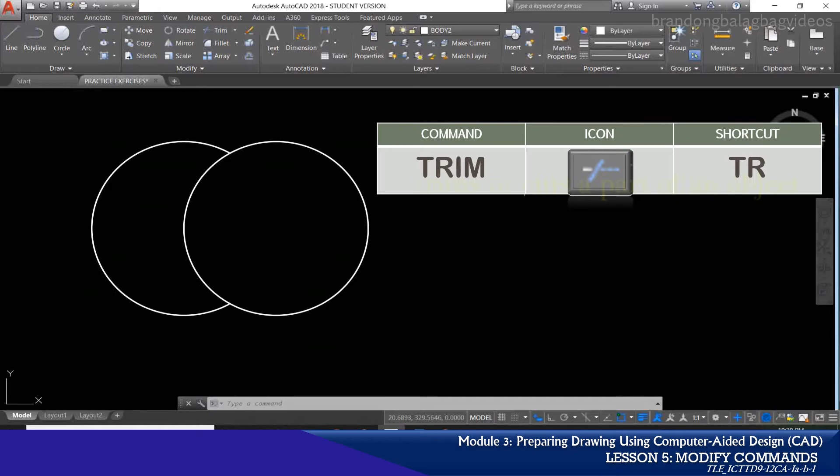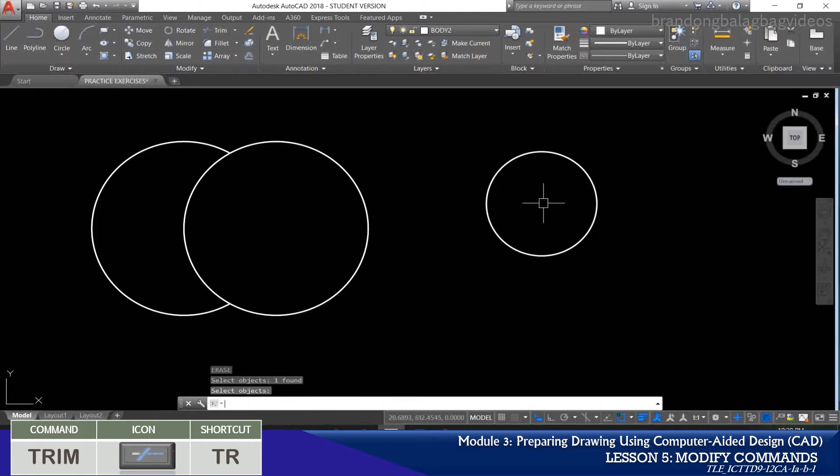Another unique modify command is the trim command. It is used when we want to make a cut or trim on just a part of an object. Let's say we want to recreate this drawing, made of two circles using the circle command. But there's a part of the drawing that should not be seen. If you use the erase command and select that object, you totally delete or remove the whole object, not just a part of it. That is where the trim command works best.

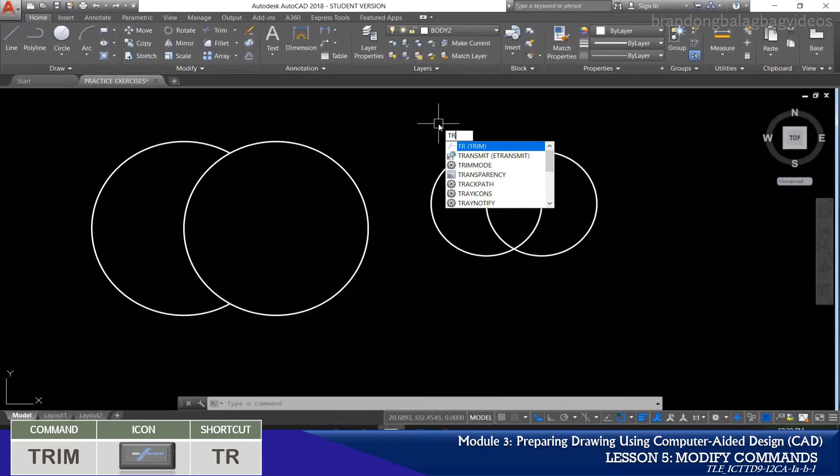There are two ways to activate the trim command. The first is by clicking the icon found in the modify panel, or by typing TR on your keyboard and pressing enter. The very first prompt from AutoCAD is to select the objects or the cutting edge, which is like AutoCAD asking you for the boundary.

In this case, we select this part of the object or the drawing and press enter. Now AutoCAD will ask you to select the object to trim, or shift-select to extend, with some choices in the command line. This prompt is asking you to select the part of the object that you are going to cut off or trim. So we select this part because this is the one that is not present in the original drawing.

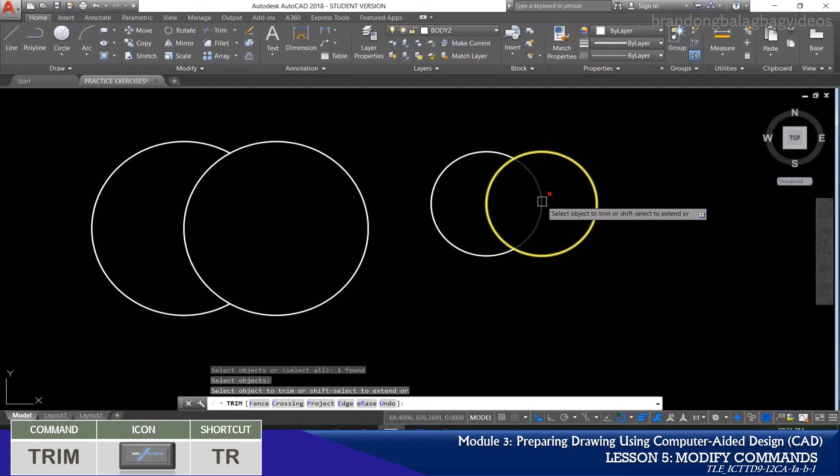When you hover your mouse over that part of the drawing, it becomes gray in color, or for other versions, dotted or dashed. This gives you a glimpse of what will happen if you select that part of the object. So it's a good choice to select this part since that's the one you don't need. Left click on your mouse, and if you're done with the command, press enter or escape. As you can see, you were able to cut this part of the circle without totally removing the whole object.

There is another way to easily do the trim command. Just type TR on your keyboard, press enter, then enter again, and then select the object or part of the object you're going to trim, left click, and enter again. So you can choose the first way, selecting the cutting edge or boundary first and then selecting the object to trim. Or the best way is just typing TR, enter, pressing enter twice, then selecting the part of the object you want to remove, and enter.

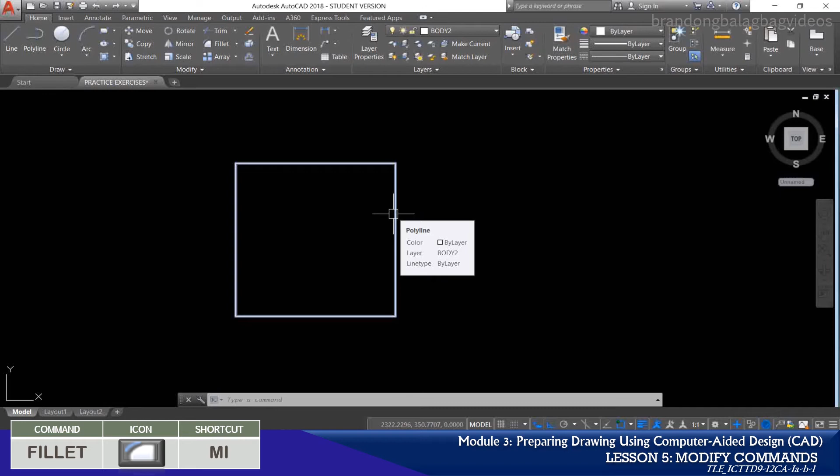Another very useful tool available in AutoCAD is the fillet command. It allows us to draw an arc between two intersecting lines or adjacent polyline segments. Let's say we want to make the edge of this rectangle have a fillet, or make it round. To activate the fillet command, we can either click the icon in the modify panel or type F on our keyboard and press enter.

When AutoCAD asks you to select the first object, there are other options available: undo, polyline, radius, trim, multiple. Usually a fillet is made by using a radius, so let's type R to represent the radius, and AutoCAD will prompt you to specify the fillet radius. In this case, let's use 5 as our fillet radius. After typing in the given radius, just press enter.

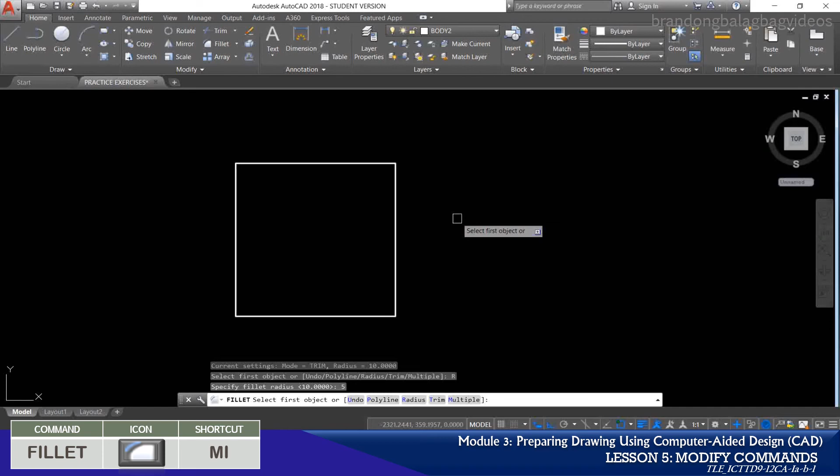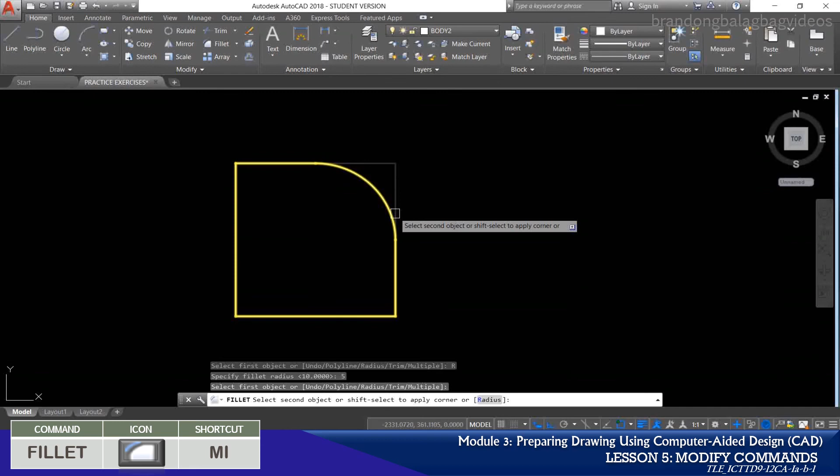AutoCAD will now ask you again to select the first object. Since we want to make a fillet on this part of the rectangle, I will choose this part as the first object, and the next prompt is to select the second object. I will choose this part. As you hover your mouse on the second object, AutoCAD will show you what the object will look like after applying the fillet command. Just left click on that part, and there you go. A fillet was already made in the rectangle that we selected earlier.